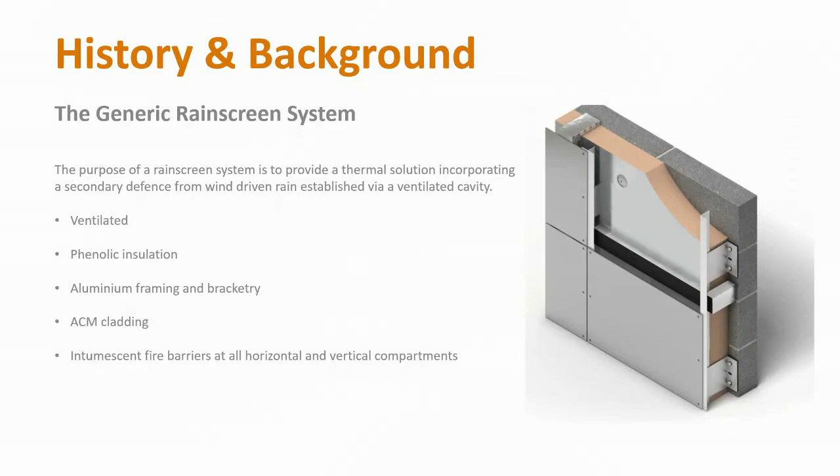Background: we have a timeline to demonstrate the speed at which this fire progressed up the facade. At 0:54 the fire was reported to emergency services, and the first firefighters reached the tower at 0:59. The fire breaks out at flat 16 within 15 minutes of that call, and within 33 minutes of the first call, the fire reaches the roof of a 23-story building.

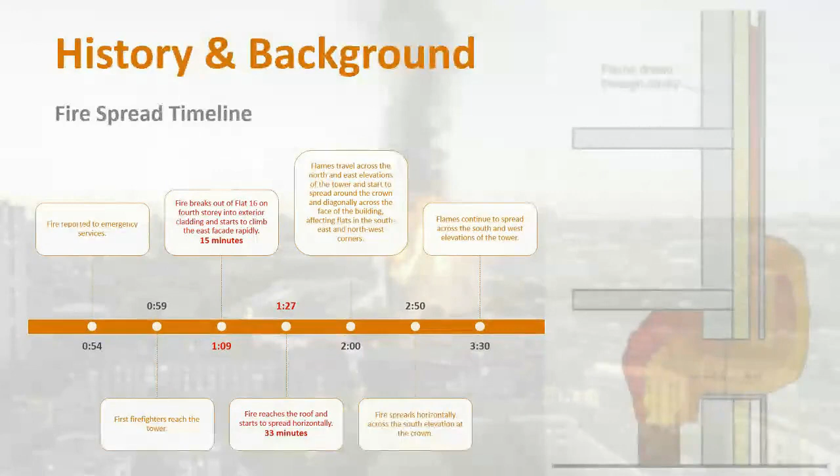It came out of the 4th story, but that's still 19 stories of flame spread. Flames then move across the north and east elevations of the tower, spreading around the crown and diagonally across the face of the building, affecting flats in the southeast and northwest corners. Fire spreads horizontally across the south elevation at the crown, and flames continue to spread. The diagram on the right indicates the elongation of the flame within the cavity as it searches for oxygen, and the importance of the functionality of intumescent fire strips to prevent that spread, which were obviously not effective in this instance.

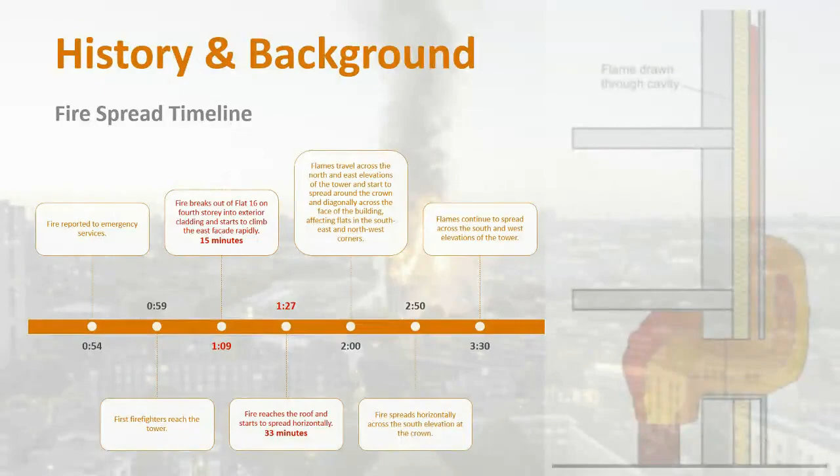So was the ACM panel utilised of a suitable fire classification to BS 13501-1? These are just questions, not necessarily pointing the finger. Were the intumescent cavity fire barriers installed correctly, and were they tested in this scenario? A lot of intumescent cavity fire barriers, whilst very effective, have been tested in scenarios that they're not actually being used physically on site.

For instance, many cavity fire barriers have been approved for use between two masonry structures and within a cavity of 50 mil, for instance, and then they get used on rain screen cladding, which is not applicable to masonry construction and may also have a cavity larger than what has been tested. Number 4: was the overall system installed in accordance with specification and reflective of what was tested, where products were substituted with economic alternatives? This is important because a lot of the time, when we're conducting surveys, we find the systems actually haven't been installed to specification for whatever reason.

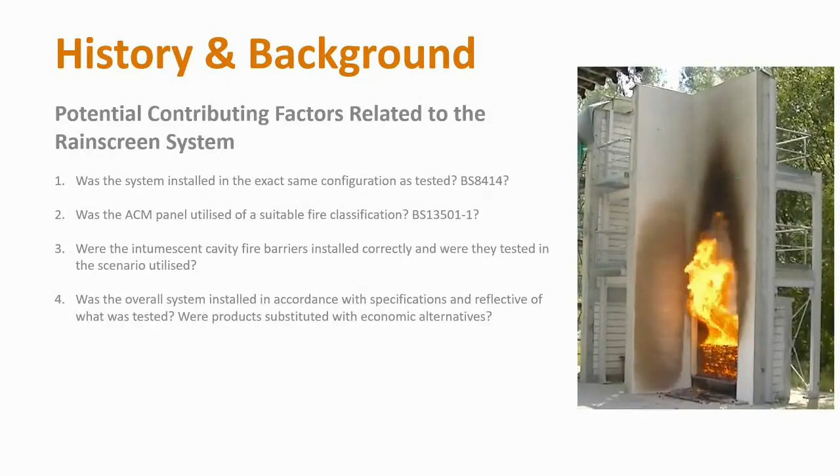Now, the warnings were there. In 1986, the Department of Environment warned about the use of combustible cladding. No change in regulation was made. A serious fire in 1991 took place in a tower block with rain screen cladding in Merseyside, shown in the bottom right-hand corner. In 1999, a fire at a PVC-clad tower block in Irvine, Scotland, shown top right. And in 2000, the Select Committee recommended that cladding products be entirely non-combustible, but ministers opted for large-scale fire testing instead.

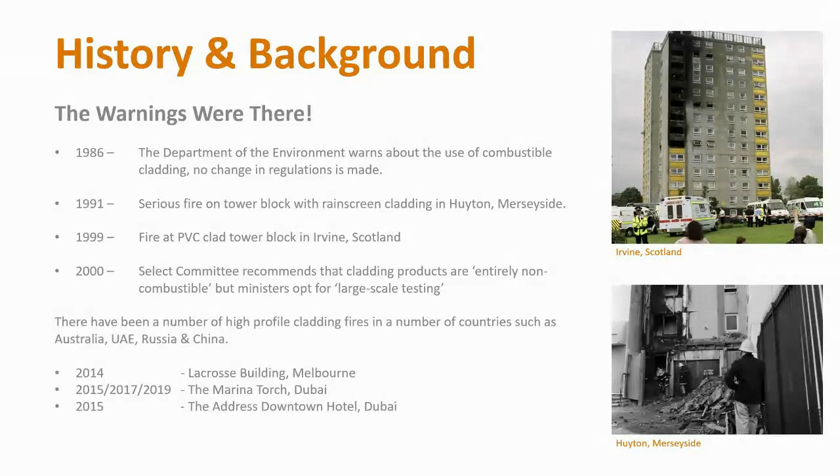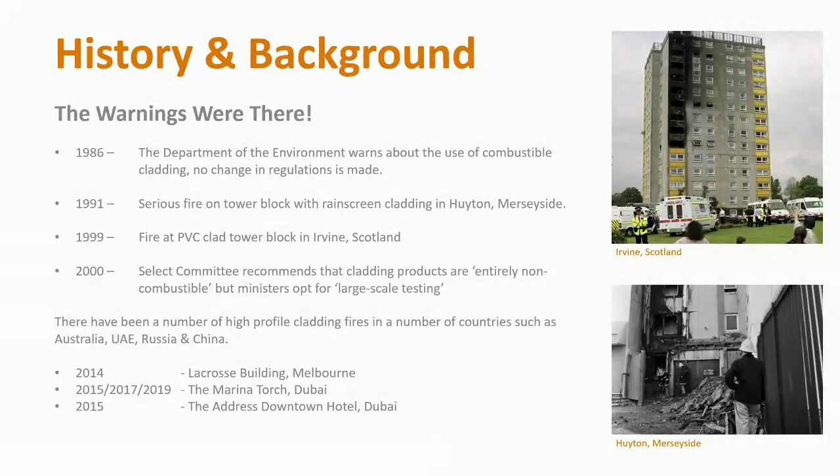There are also other instances around the globe that were providing us with warnings. In 2014, the Lacrosse building in Melbourne. Believe it or not, the Marina Torch in Dubai caught fire three times, and also the Address building in Dubai. There are others in China, Russia, and all over the globe.

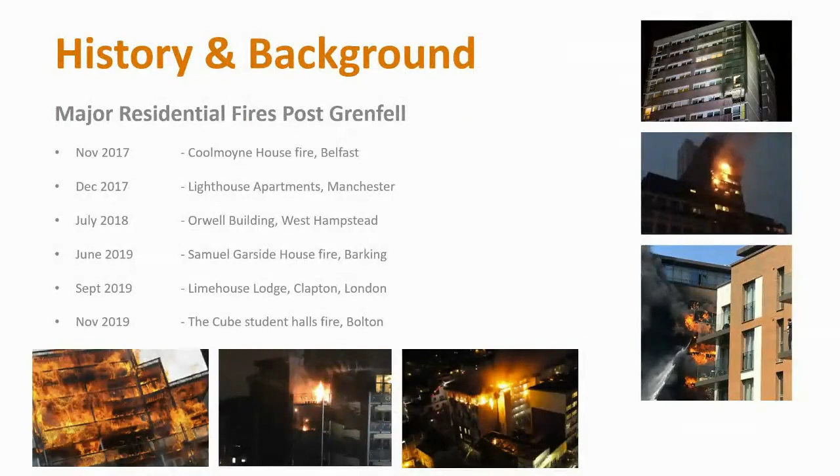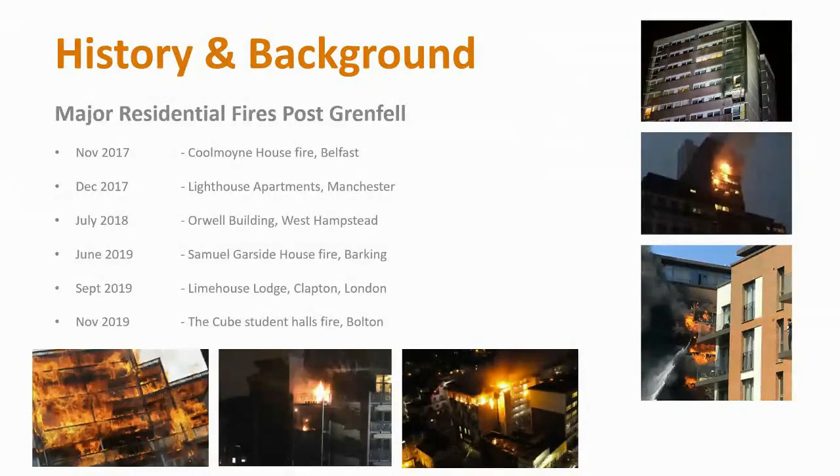Also, after Grenfell, there were a number of fires within the UK of a similar nature. You can see a list: in November 2017, the Coolmoyne House in Belfast, and in December 2017, the Lighthouse Apartments in Manchester and West Hampstead. So the problem is still here.

So what happened after Grenfell? On the 16th of June, just after the fire which took place on the 14th, the government ordered social landlords to carry out audits on all the tower blocks. On the 19th, the government ordered social landlords to send ACM panels for testing to laboratories. Of the 120 sent for testing, all failed.

The government announced a program on the 6th of July for full-scale fire testing of ACMs only. On the 28th of July, a large-scale fire test using the exact materials as per Grenfell failed within 7 minutes. On the 1st of September, the government issued advice that building owners must seek professional advice, without necessarily outlining that specifically.

In October 2017, the National Fire Chiefs Council publishes guidance recommending waking watch fire patrols. Those of us that live in city centres will have witnessed these firsthand. On the 18th of December, Hackitt issues her interim report, and on the 19th of December, 284 dangerous tower blocks were identified.

Moving on to 2018, on the 10th of January, mortgage lenders start to refuse to lend due to combustible cladding, and this is a massive problem for the UK as it stands at the minute. Leaseholders start to be warned they face massive bills for the rectifications.

But for us to understand where the problem arises, we need to understand what defines a high-rise. Generally, it's a building which is higher than the maximum reach of the firefighting equipment, and any structure where the height can have a serious impact on evacuation.

Now, these are just general terms, and we're going to go into the more specific geographical definitions of what high-rise are. But where the number of stories means the occupants need to use a lift or elevator to reach the destination, that can also be classified as a high-rise structure.

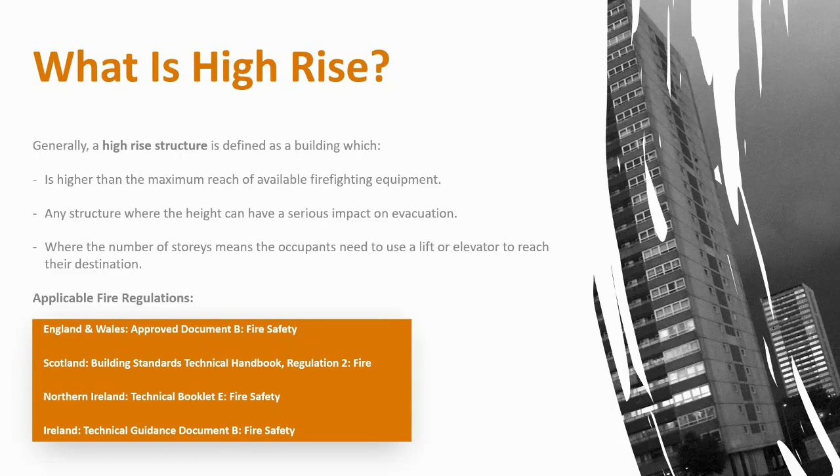The applicable fire regulations: in England and Wales, that's Approved Document B. In Scotland, it's the Building Standards Technical Handbook, Regulation 2. In Northern Ireland, it's Technical Booklet E. In Ireland, it's Technical Guidance Document B. All have slightly different views on what high-rise is.

In England and Wales, a high-rise building is defined as a building with a story at least 18 metres above ground level, not including rooftop plant areas. Now, the government's currently in consultation, and it's likely that this will reduce to 11 metres. So you can imagine that will open up a significant number of additional blocks that will have to have that EWS1 form.

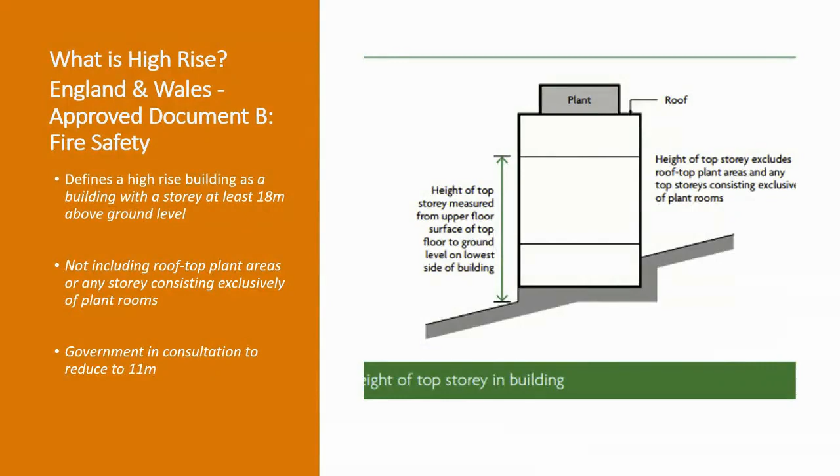Scotland have already adopted the 11 metres. It's the same definition as England and Wales, just that it's 11 metres as opposed to 18, and it defines high-rise as a building with a story at least 11 metres, again excluding plant.

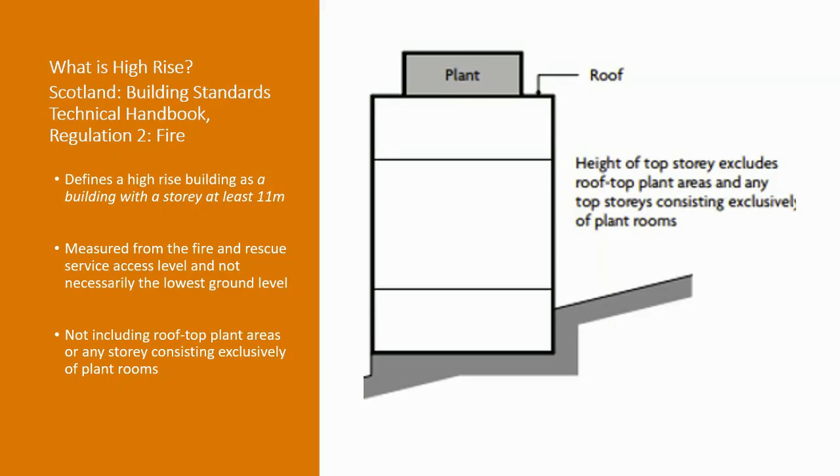Moving into Northern Ireland, this defines a high-rise building as a building with a story at least 18 metres above the lowest ground level. Again, just a slight adaptation on what we discussed earlier for Scotland and England and Wales, but still it can be quite pertinent if the ground levels are sloping, as is demonstrated in the graphic to the right. Again, not including rooftop plant areas.

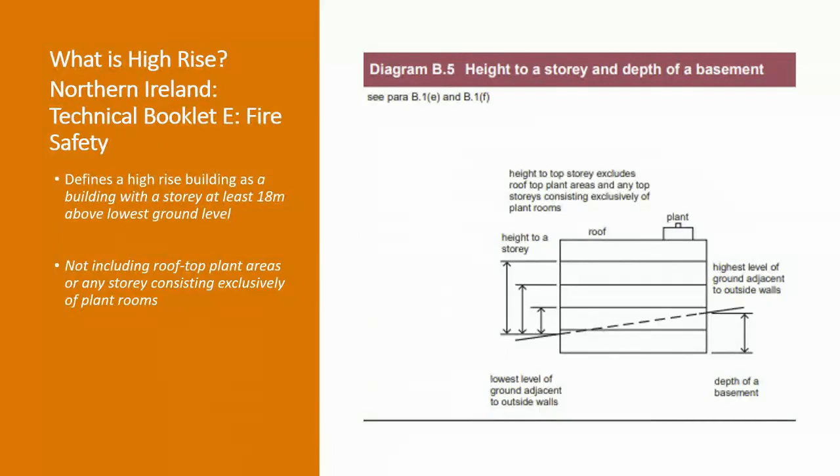And for Ireland, it's quite a bit different. It defines a high-rise building as an 18-metre building. Ground level is measured as a mean, as is the roof level. So that is the most different from the ones we discussed.

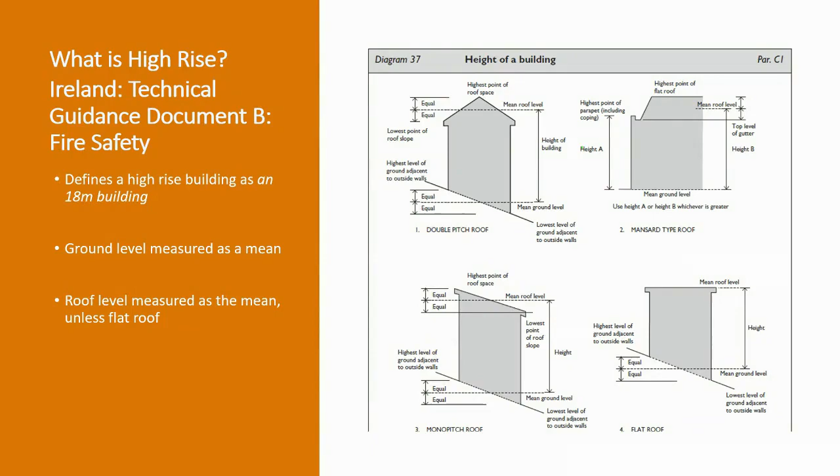So to understand combustibility, there are 4 tests that contribute to defining and understanding BS-EN 13501, which provides the classification for combustibility. You have a single burning item test, a single flame source test, a non-combustibility test, and a heat of combustion test. All of these tests contribute to providing the classification as disclosed in BS-EN 13501.

Now, the main classification, and many will be familiar with it, can be A, B, C, D, E, all the way to F, or A1, which is the highest classification, meaning totally non-combustible.

But if you're not A1, you typically get a smoke classification associated with that. It's indicated by either S1, S2, or S3, with S1 being the best classification, or the weakest smoke emissions, and that's really what we should be aiming for, because smoke kills just as much as fire, if not more. And flaming droplets is an important classification where I'm concerned, very similar to the smoke classification.

This is either D0, D1, or D2. D0 is the best. Why is it important? If you're on a high-rise building surrounded by parked cars, for instance, if you have a high classification for flaming droplets, it's likely that those flaming droplets could set fire to the surrounding cars or even an adjacent building. Therefore, what you're really aiming for is a classification of D0.

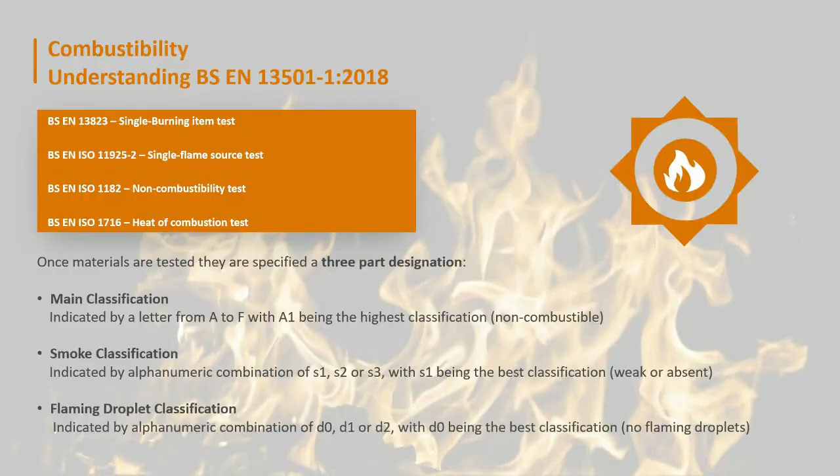So this gives further confirmation of what these classifications mean. A1 is non-combustible, with no contribution to fire. A2 is limited combustibility, very limited contribution to fire. B, C, D, E, F are classed as combustible materials, but they change in severity, going from limited to minor to medium to high to very easily flammable. So to give you an indication, E will be something like EPS, D and C are like phenolics, and A1 is your rock wool.

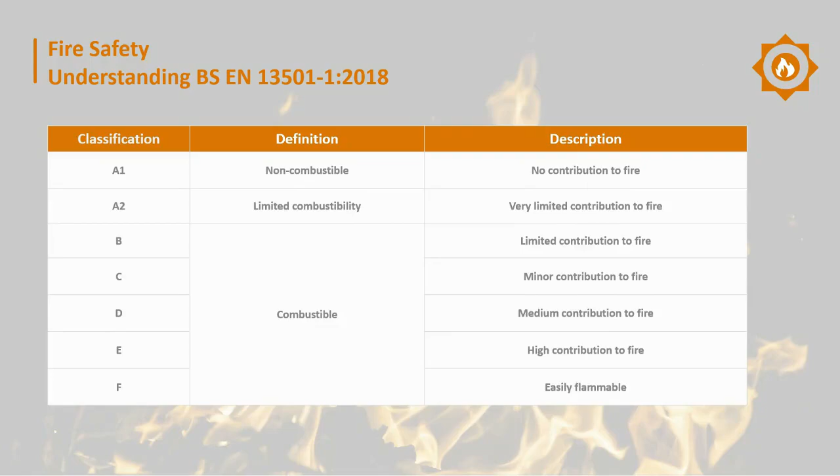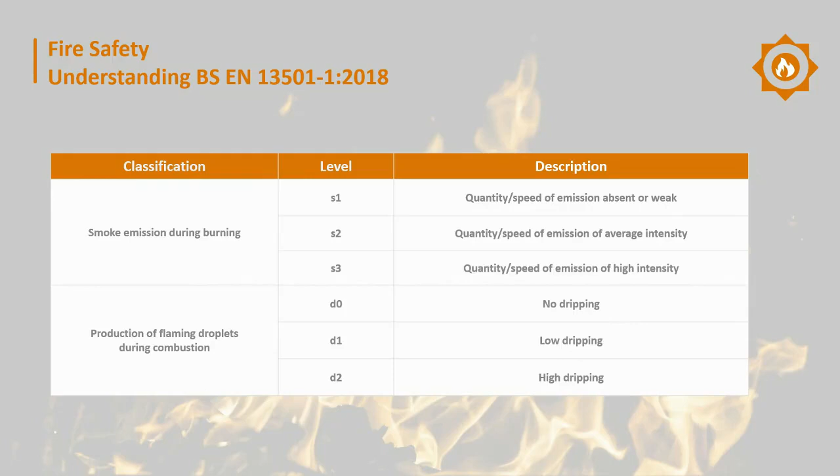So we now move on to what the EWS1 cladding assessment is and how it works. I've created a simple flow chart. Basically, when a high-rise building is suspected to have flammable cladding upon it, a fire engineer needs to do desktop research on the specification and the cladding. At that point, the fire engineer can deem the building sufficient with their expertise and knowledge of what's been installed, and with sufficient evidence, they can issue an EWS1 from that.

If insufficient evidence can be ascertained from a desktop analysis, then we move to stage 2, where a report is required, needing either a non-invasive inspection, a low-invasive inspection with keyhole, or a fully invasive inspection, depending on what is outstanding from the initial desktop assessment. For instance, the engineer may want to know what insulation is in the cavity, which isn't apparent from the outside of the building. The fire engineer then creates a report.

They can then issue an EWS1 report for no remediation at that point. But if they do deem that there are issues, then a remediation report will be prepared and tendered by contractors to rectify the situation. Whilst this is all going on, the other suspected elements that may be affected, i.e. internal elements, will also be inspected. The works are then completed to that remediation report, and then an EWS1 form is issued after final inspection by the engineer.

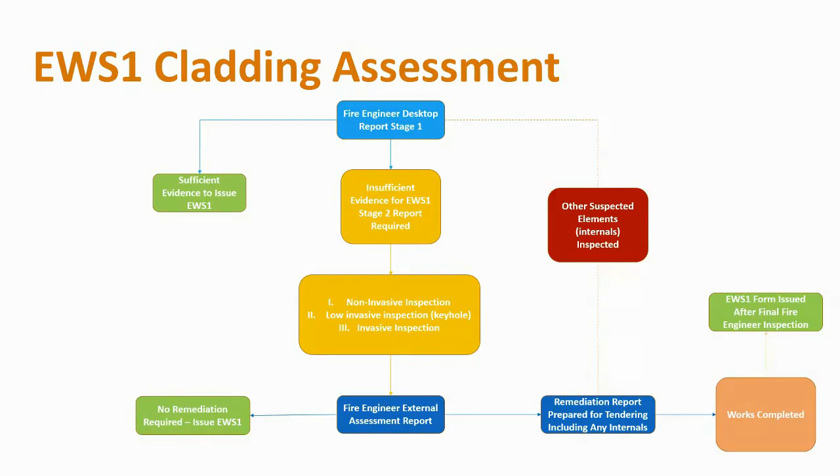As I mentioned at the beginning of the presentation, we have come across a number of non-compliance issues when conducting these invasive surveys. First, fire barriers - either installed incorrectly or not installed at all. Cavity fire barriers - again, installed incorrectly or not at all. Combustible insulation used where non-combustible should be specified and installed. Non-compliant insulation installed at height or not tested effectively, as we were saying about the BS 8414 test. Systems installed not in accordance with what has been tested. Combustible sheathing boards is a big one as well.

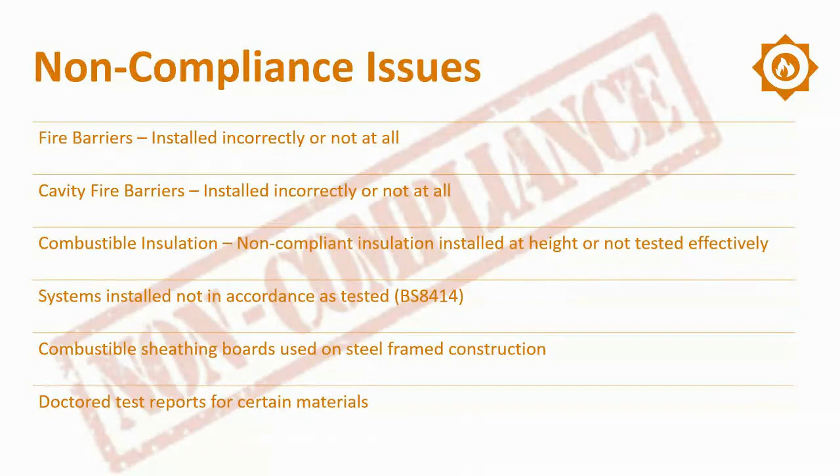Every time we're opening up lightweight steel frame constructions, what we're finding is that the actual cement particle boards or sheathing boards are combustible. And then, doctored test reports for certain materials - I won't go into this too much due to legal reasons, but if anyone's up to speed with the news at the minute, there have been issues with certain material suppliers not providing testing reports applicable directly to their materials.

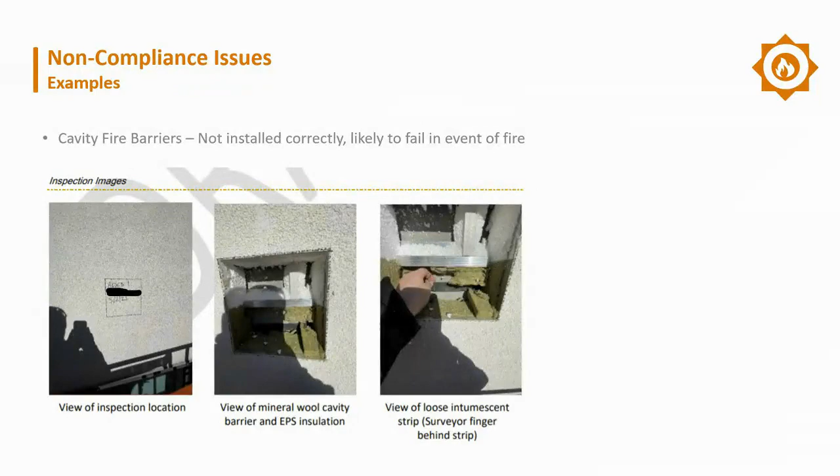So here we have some photographs of some invasive surveys that we've done, highlighting some of the things we've come across. We've cut open a hole on the left-hand side, and in the middle you can see there is a fire barrier - a mineral wool fire barrier - but there's a cavity behind the system. The intumescent fire strip should be installed correctly; in this instance, it's loose. So in the event of a fire, there is a possibility it could dislodge and not serve its purpose. This makes it non-compliant.

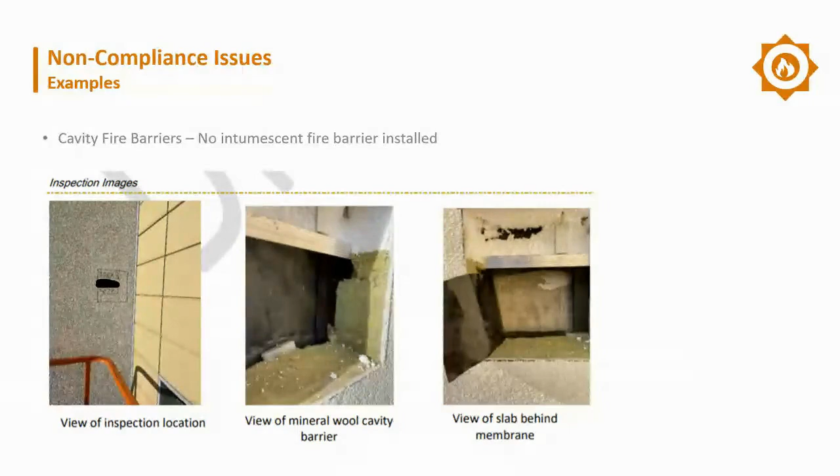Cavity fire barriers - no intumescent fire barrier installed at all. As you can see here, we have a ventilated render system onto a steel frame, and there's no intumescent fire barrier at all. So if there was a fire that breaks out of the window, similar to Grenfell, it would pass up that cavity unrestricted and spread to the EPS above it. That's non-compliant.

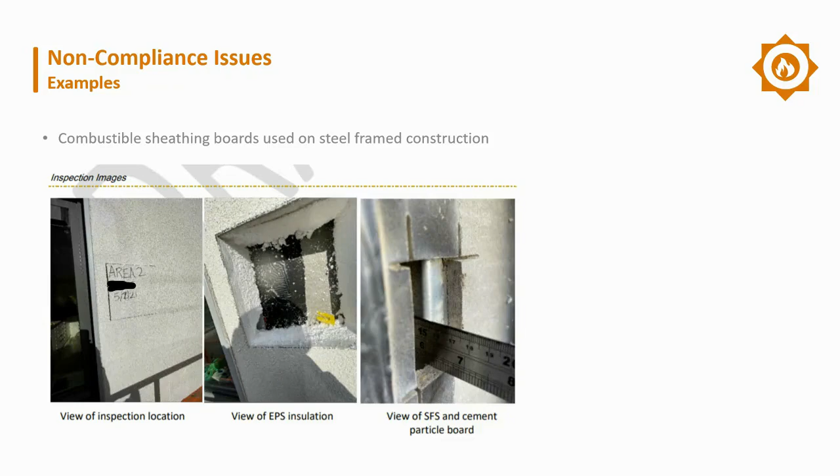Combustible sheathing boards, which I mentioned before - we're finding a lot of Class B, where we should be using A2 or A1 on high-rise. Now these may have been compliant at the time of installation if tested in accordance with the full-scale fire test, but what we're finding is these boards weren't the ones used for the full-scale fire test, and therefore they're deemed non-compliant.

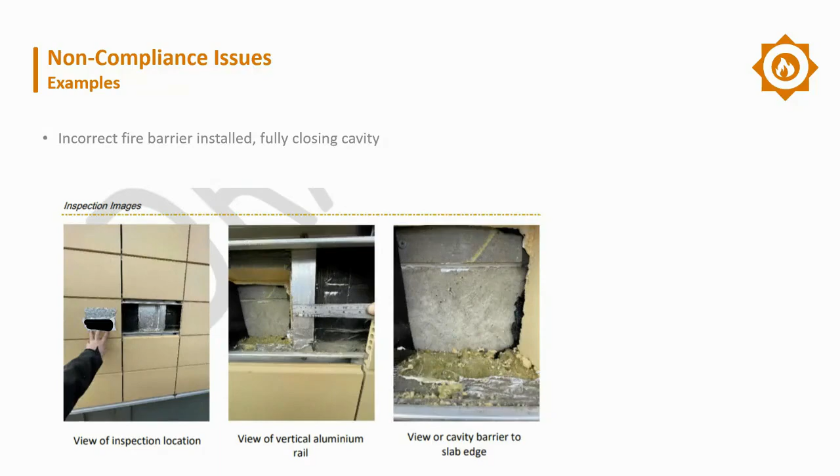Incorrect fire barriers - you can see here, this is a ventilated system or rain screen system with terracotta tiles. This should maintain a fully ventilated system, but they've installed full cavity fire barriers which are closing the ventilation of the system. Whilst this might not negatively affect the fire performance of the system, it could have a detrimental effect on its ability to manage moisture as a secondary defense system. Non-compliant.

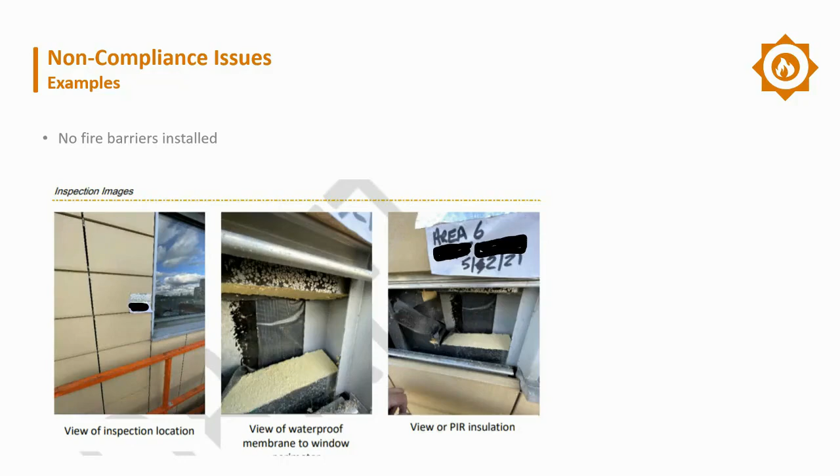No fire barriers installed at all - one of the worst case scenarios, there wasn't even an attempt in this particular instance to install a fire barrier. Non-compliant. So, non-compliance issues associated with intermittent fire strips.

Suppliers of the intermittent fire barriers only test in certain substrate configurations - I did touch on this before. Typically it could be a timber frame situation to a certain grade of timber, or a steel frame situation to a certain type of sheathing board. What we're noticing a lot when exposing and getting into these ventilated systems is this isn't the case - the intermittent fire strips or cavity barriers are actually being used generically in whatever configuration suits at the time, which can obviously prove dangerous and hasn't necessarily been tested.

Different strips are required for different cavity depths. We've noticed there's undulation in substrates as they're built, and those undulations can be anything between 50 mil to 100 in some instances. But the cavity barriers we've found in some instances have actually been sized for a consistent cavity. So if that cavity is increased by up to 50 mil due to undulation in the substrate, they're still using a cavity fire barrier only suitable for a 25 mil cavity. So it becomes null and void and not fit for purpose.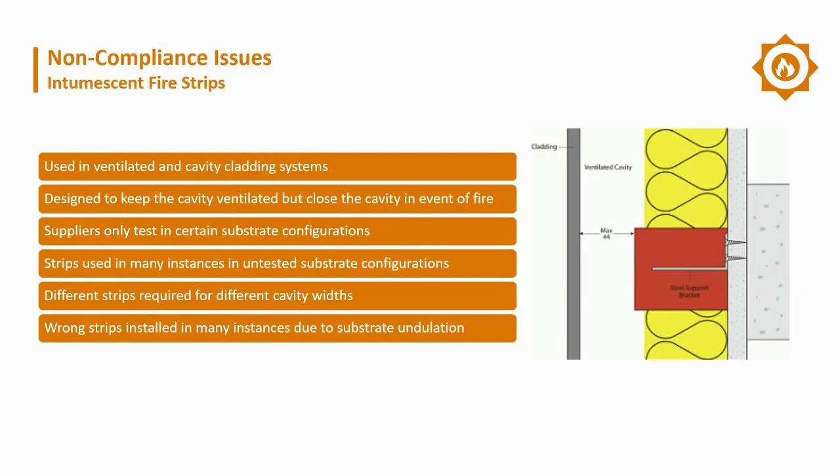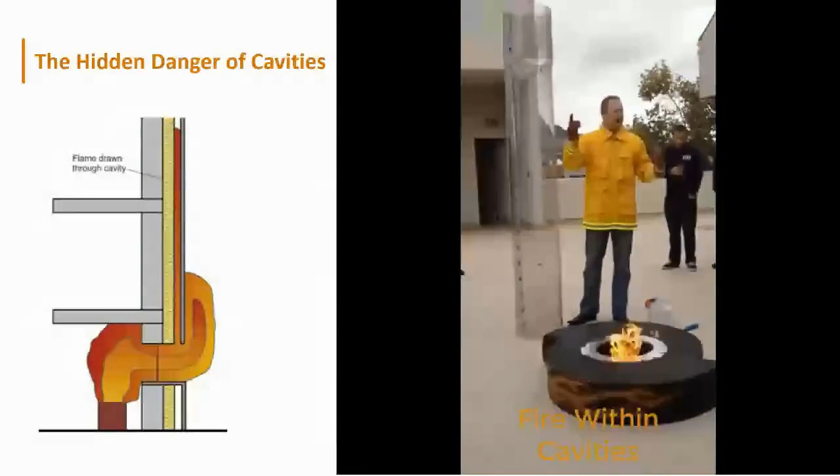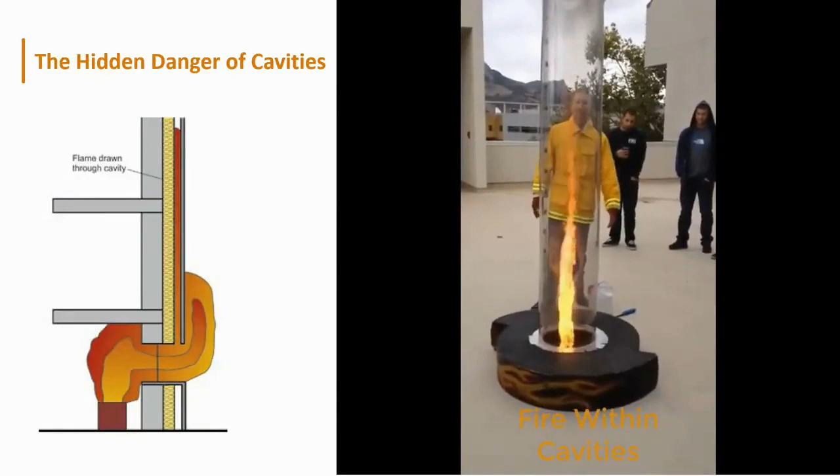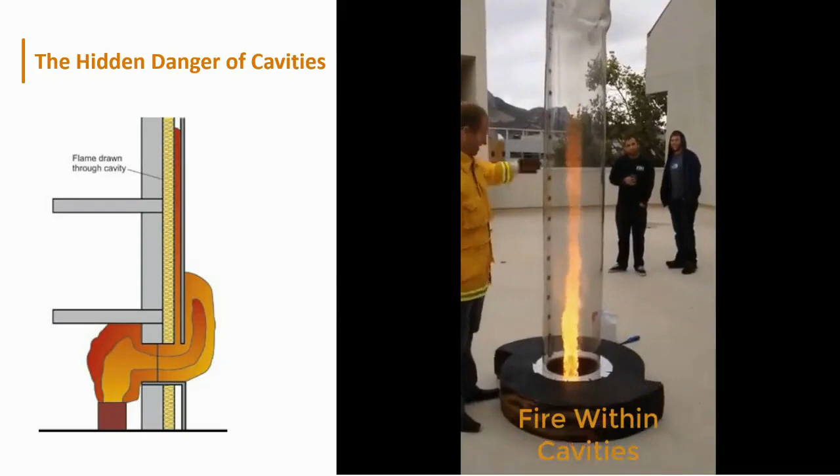Here is a video just demonstrating how fire reacts when it enters into a cavity. You can see the diagram on the left, similar to the makeup we discussed before on the rain screen system. The fire is pretty content as it is there until it's starved of oxygen, and then you can see how very quickly it elongates. The importance of the speed of these intumescent fire barriers to close off these cavities is immense - you can just see how quickly it happens, and you can imagine the intensity and heat generated at the edge of that flame as it searches for oxygen.

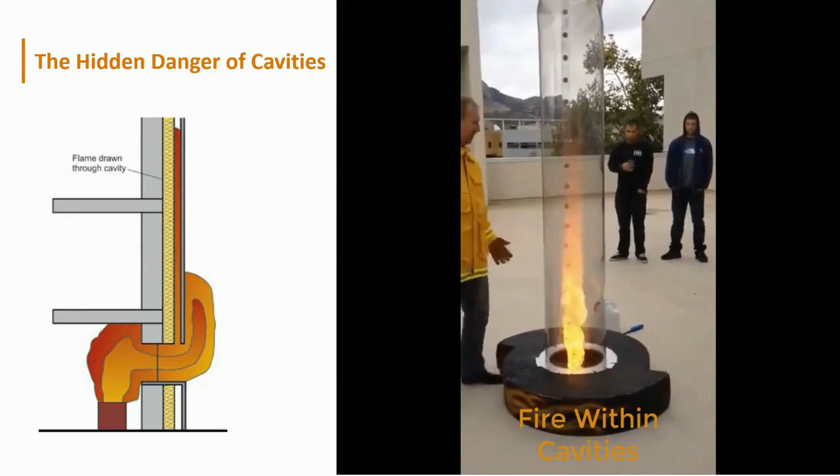You can see the fire intensifies.

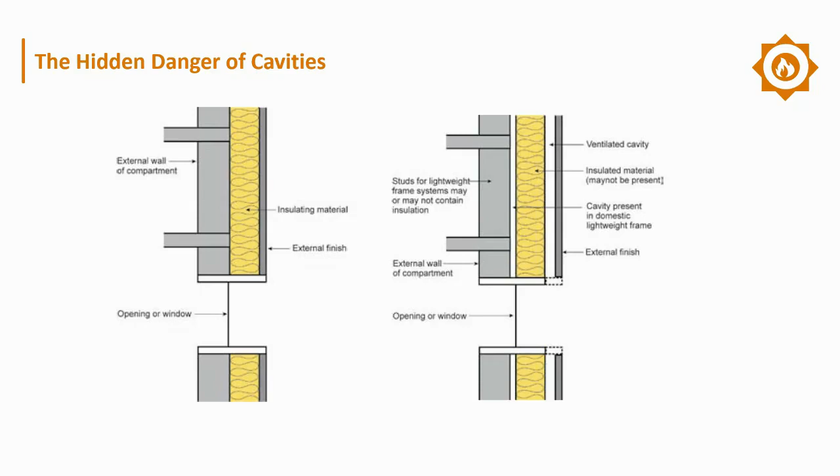So here, again demonstrating on the right-hand side, we have a cavity system. But if there's an opportunity, we can offer a system that doesn't incorporate cavities and could actually be 100% non-combustible.

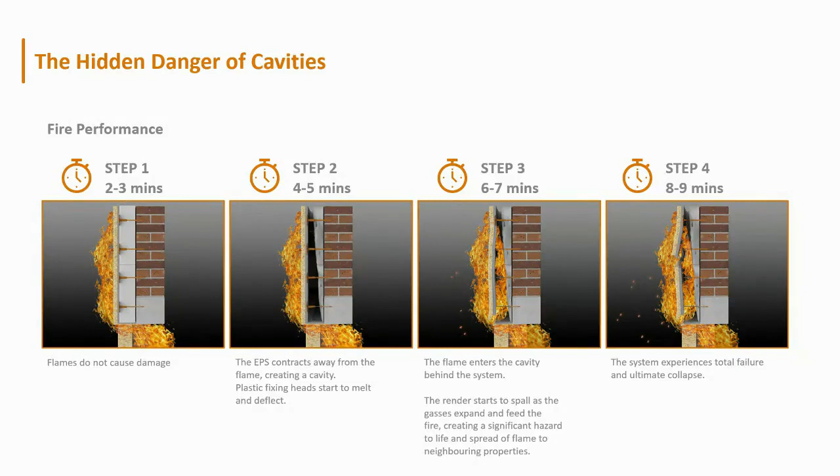But we can't just consider fires breaking out from windows. We do need to take into consideration things like bin fires and garbage fires on the outside of buildings, car fires, even in car parks that surround buildings of this nature.

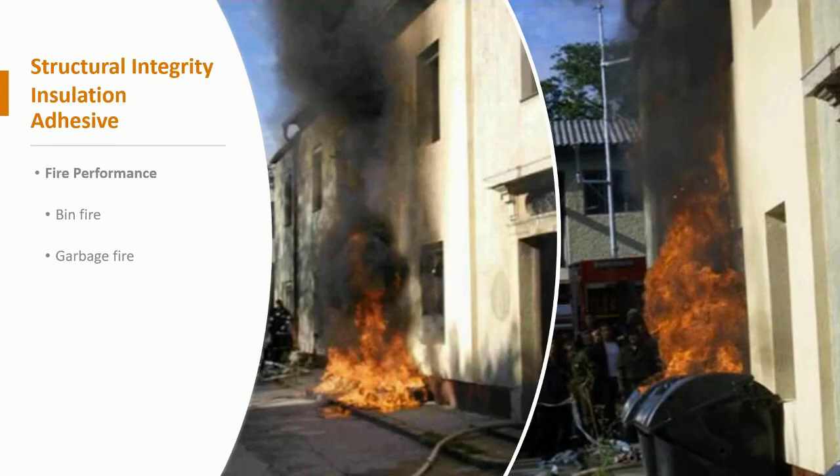So how do we achieve compliance once we know that the system is combustible? Firstly, scenario one is a desktop analysis and the completion of an EWS1 by a fire professional. Scenario two is remedy: a physical facade inspection, introduction of fire barriers, and replacement of combustible materials, fire testing of panels, and then completion of the EWS1.

But in many instances, what's happening is scenario three, which is a full strip and reclad. So a physical facade inspection, you fully remove the existing system and sheathing, and replace with a 100% compliant system, which ultimately leads to the completion of the EWS1 form.

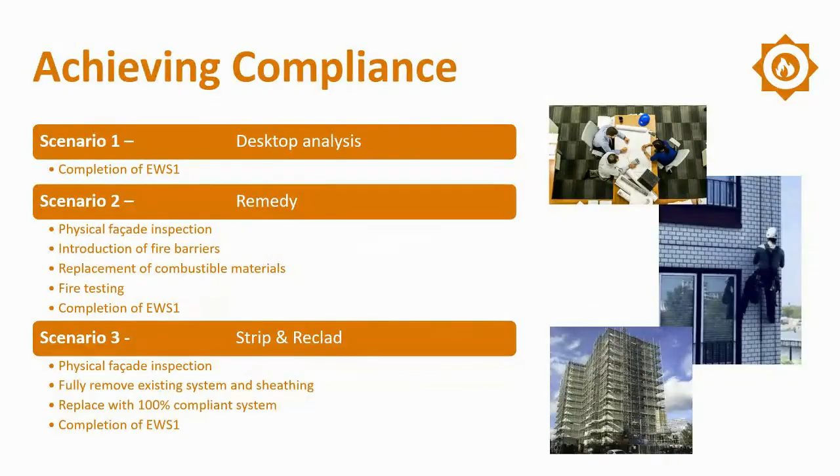So how can we help? Initially, we can engage and assess and conduct assessments of the building. We can provide a fire engineer to professionally evaluate what is on the building, accommodate practical investigation via rope access if required, and implement remedial work - supply certified systems, non-ventilated systems, installed by trained and registered contractors, where we adhere to a stringent high-rise and complex project policy, which I'll demonstrate in a minute, and also complete the EWS1 form. Provide a 100% compliance guarantee after that process, and offer industry-leading warranties.

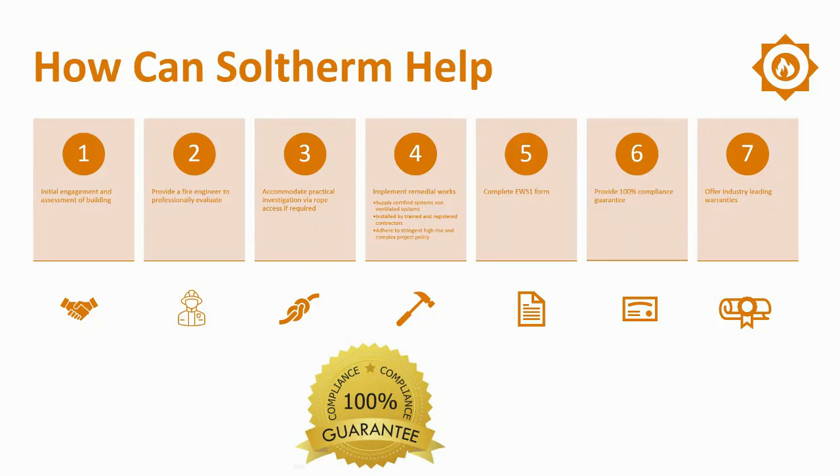The high-rise building policy is designed to manage the risk of our clients and tenants.

It's 10 easy steps. We only use certified systems, whether that be BBA, BDA, or ETA. We only use systems that are A1 or A2 S1D0. We ensure we conduct a U value and condensation analysis within the requirements of building regulations.

We only use European technically approved mechanical fixings. We implement robust detailing driven from our trade association, ensuring - because a lot of these buildings, it's hard to get to these details and maintain them - so they have to be robust and require as little maintenance as possible.

A structural survey - we insist that the contractor or client conducts a structural survey on the substrate to ensure that it is capable of taking the dead loads associated with our system design.

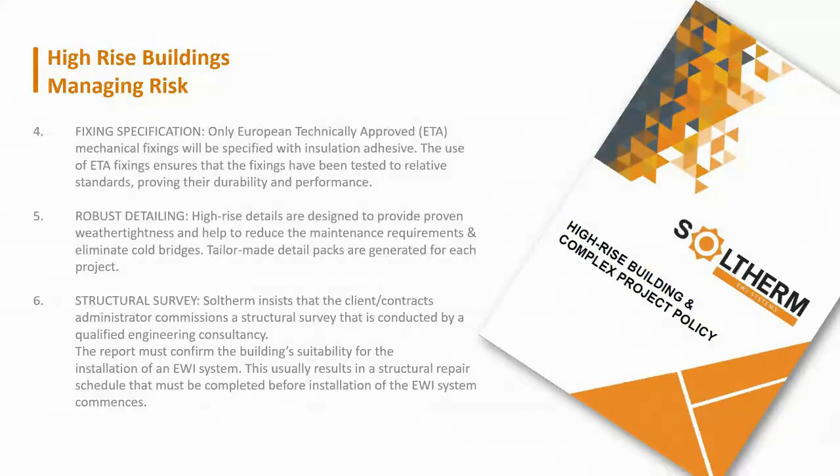Number 7, we conduct pull-out tests in accordance with relevant recommendations. We do those on site, and when it comes to high rises, we conduct them on every floor as well. We conduct wind load calculations in accordance with Approved Document A, and that's in accordance with BS-EN 1991.

And we only install with a small network of registered contractors that are approved for high-rise buildings. Contractors are also PAS 2030 and 2035 accredited, ensuring they are all fully familiar with the system specification and installation requirements.

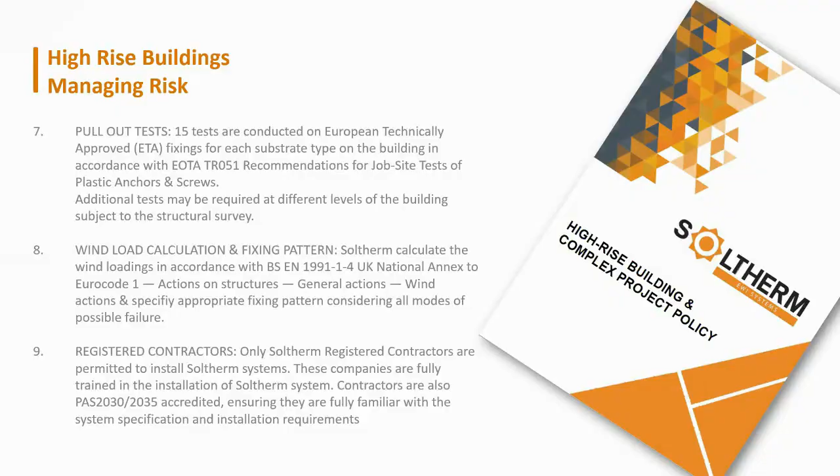Site support is really important for me, having witnessed some installations not being in accordance with the specification. It's very important that these site technicians visit site at least once a week, ensuring the system is being installed to specification.

So our solutions that we can offer to address the situation of combustible cladding - we have 6 main brands. We have Premium, which is an economic, fast and lightweight system. Now, this isn't a brand we'd utilize for this particular problem because it utilizes EPS.

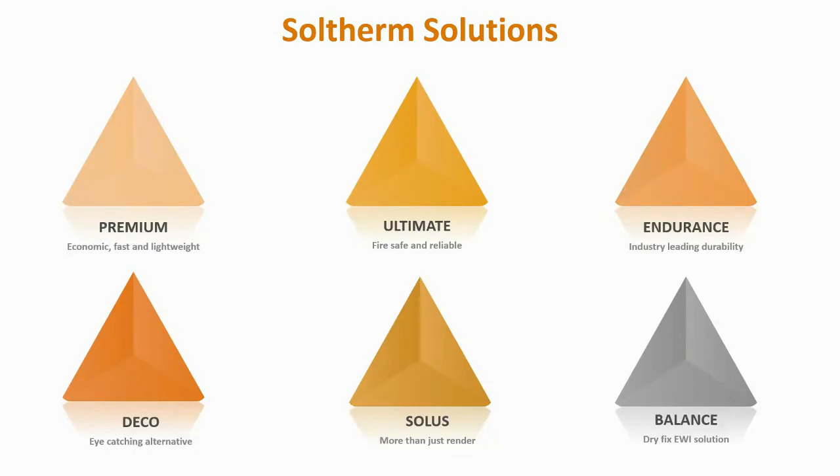The Ultimate brand is fire safe and reliable. Endurance brand provides industry-leading durability. Deco is an eye-catching brand, more of an architectural solution - brick effects, wood effect, etc. Solus is a render-only system, and Balance is a dry-fix system. Again, these won't necessarily come into play when addressing the EWS1 requirements.

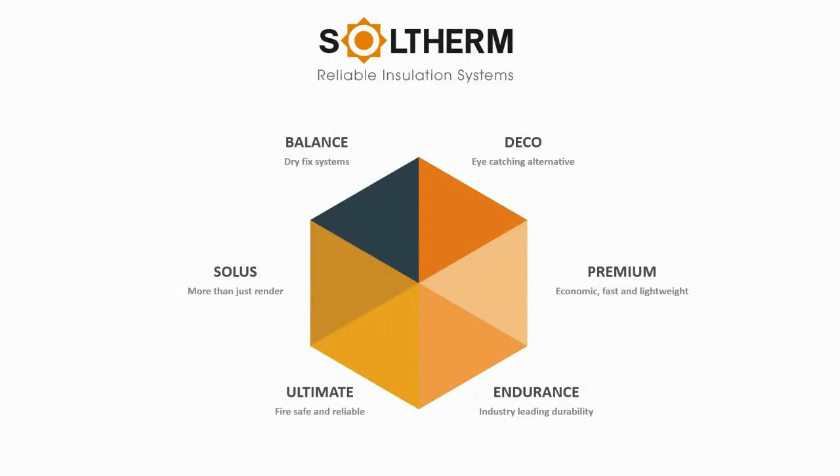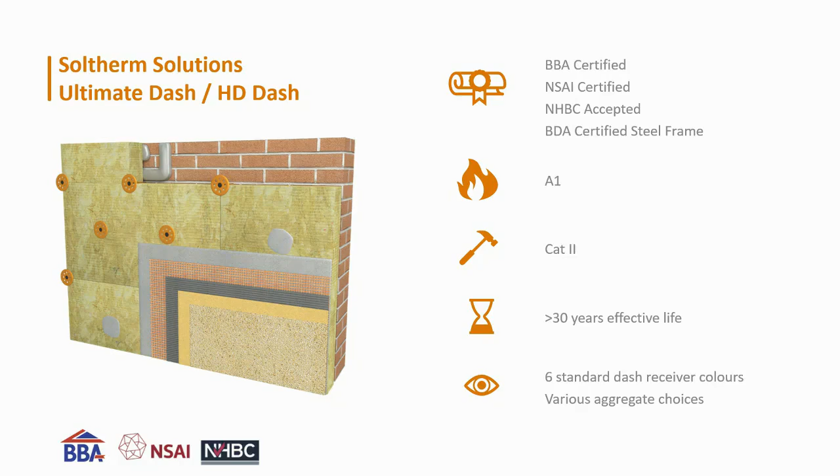But you can see here how our brands all pull together. Ultimate is probably the most suitable solution for addressing these issues. We can have a dash system there. You can see the accreditations, BBA, NSAI. It's A1 non-combustible, available in a number of colours, and can also be utilised on steel frame.

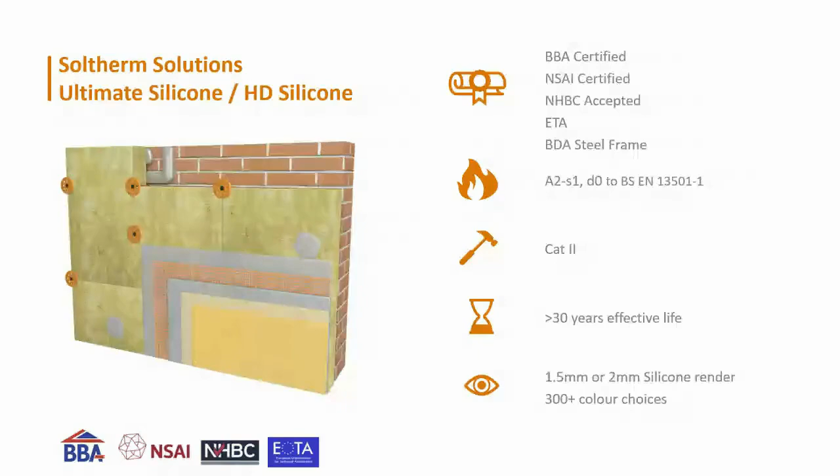We also then have our Silicone HD system - again, with all the approvals, it's A2 S1D0, so it meets the requirements of building regulations and comes in various textures. And we also have a fully non-combustible system, A1 non-combustible, called Ultimate A1 Mineral, which again has all the relevant accreditations.

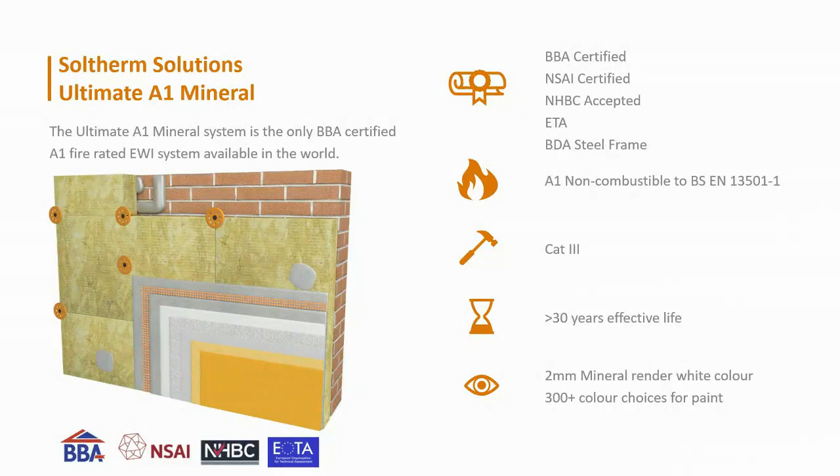It's the only BBA certified A1 system in the world. There are other A1 systems out there, but they don't have BBA accreditation. This is an A1 EWI system.

Fire regulation compliance is 100% guaranteed when utilizing this system, in the event that you go down scenario 3, which is your strip and reclad. Utilization of specialist A1 components and materials are what allow this system to achieve this industry-leading A1 fire classification. And it can be utilized with 300 plus different colours.

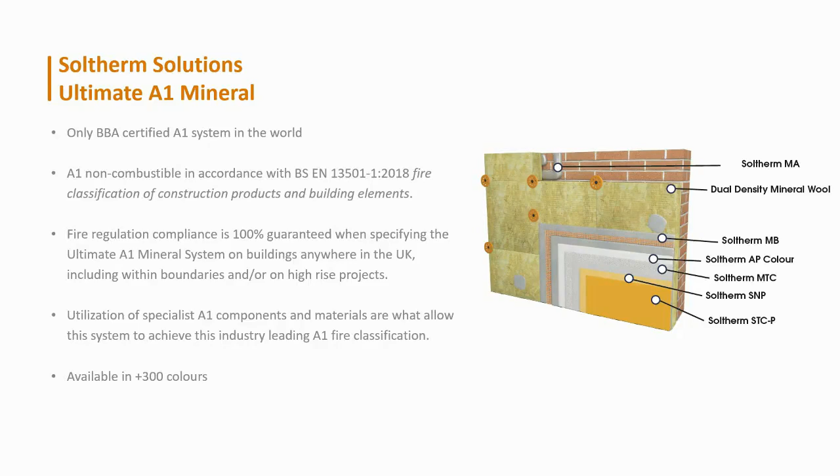The Endurance system, this is extremely unique in the industry due to the high impact resistance that can be achieved. The system itself, this particular system, which is Endurance W HD Silicone, can achieve 36 joule impact. That's 4 times better than category, the best in classification for EWI systems. So if you're down at low level and want to increase the longevity, this is the system of choice.

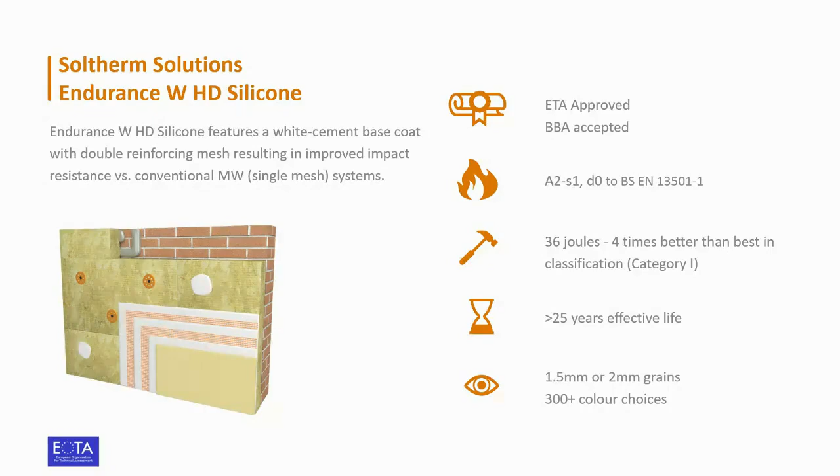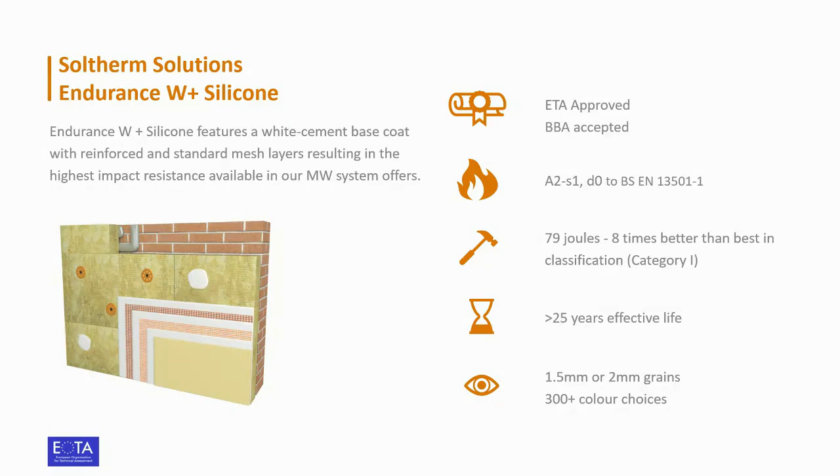We then have the same system, but with an improved use of reinforcement mesh, providing an impact resistance 8 times better than best in classification. Again, both of these systems achieve the required fire classifications as well.

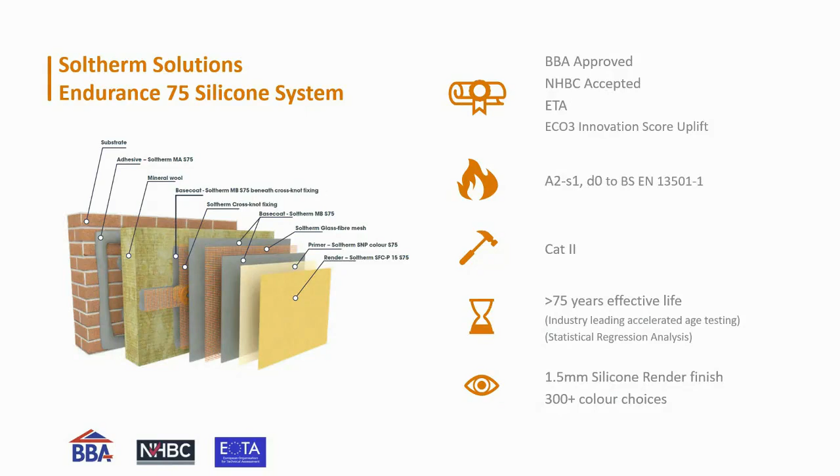And then we have our innovative solution, which can generate innovation uplift, which is our Endurance 75 Silicone system. This is a 75-year effective life system. We tested this through industry-leading accelerated age testing and statistical regression analysis. As you can imagine, it's very unique in the industry in terms of its durability and some of its other technologies.

Deco, again, these are systems that can be used. Typically, these get used at low level to provide a decorative solution.

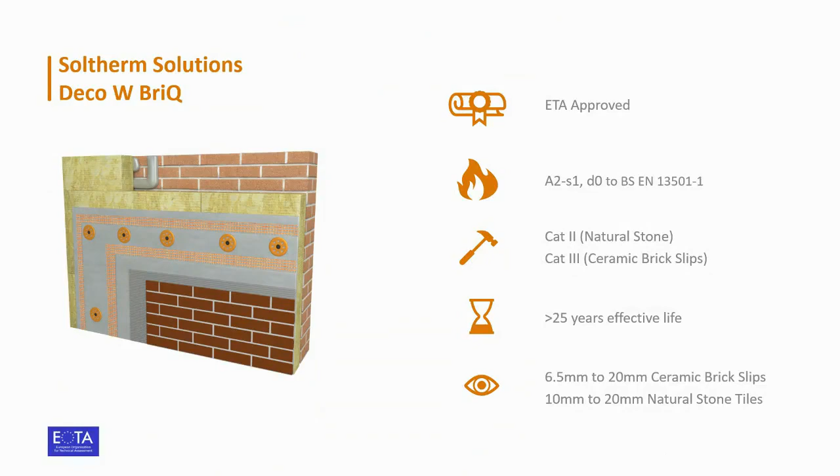And now we come on to why you'd actually choose Soltherm to assist you if you were to have a building that had been deemed to have combustible cladding. One, we conduct the U-value calculations, condensation analysis, and we can also conduct WUFI calculations with our technical teams in Poland, which is unique in the industry.

CAD drawings, a suite of standard details, although on high-rise buildings, as part of our policy, we provide a bespoke detailing pack. We conduct the wind load calculations in-house with our qualified engineers. This means a very quick turnaround, and we can get fixing patterns updated very quickly.

As mentioned before, we utilise registered contractors, a national network of highly trained and experienced contractors. Site support, I won't go into it again, but you know how important I believe this to be. If it isn't monitored and assessed by our technical managers, it has the possibility not to adhere to specification in certain instances.

Innovation as well. Soltherm are a very innovative company with innovative systems, allowing clients to extract additional funding. We're funding experts. We can provide funding advice. We develop partnerships. We like working in partnerships with industry leaders, generating a deep understanding of government obligations.